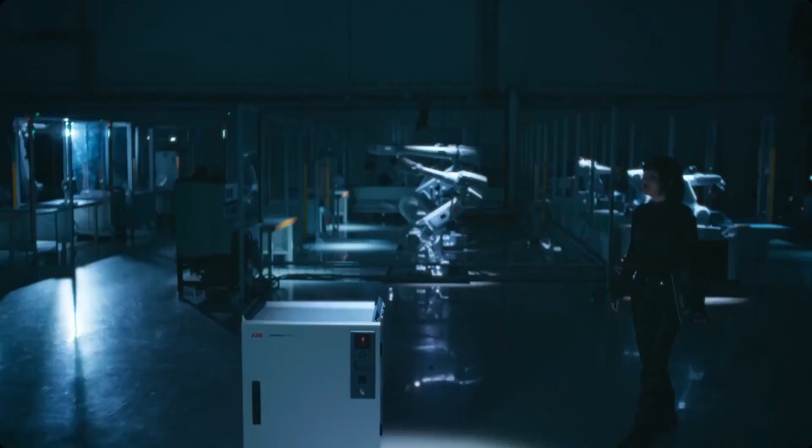Today we would like to guide you through our mission, our statement of the sustainability agenda, and how we have designed our robots, starting with the robot controller, the robot itself. We also have a service perspective on what we are doing to guide you through the life cycle, and end with a summary and a Q&A.

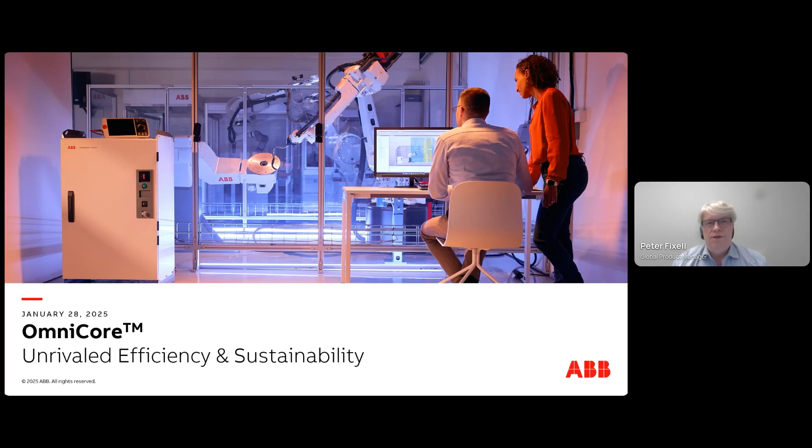My name is Peter Fixell, and I'm the Global Product Manager of Robot Controllers. But first, let's start with the first topic on our agenda, the sustainability part. And with us, we have Emma.

Hello everybody and welcome. My name is Emma Brimdyr, and I am the Global R&D Sustainability Specialist here at ABB Robotics. I'm so glad that you are all joining us today. As Peter said, I'm here to talk about our sustainability agenda here at ABB Group.

We have three main pillars in our agenda. The first is that we enable a low carbon society. We also promote social progress. And our third pillar is that we preserve resources. While working with each of these, we make sure to constantly have integrity and transparency.

For each of our three pillars, we have many goals that we are working towards. To enable a low carbon society, we are working to be net zero by 2050. We are also aiming to preserve resources by ensuring our products are circular, and have goals to reduce the amount of waste that we send to landfill and to protect the water, biodiversity, and the use of land.

For social progress, we are striving to have more women in senior management and ensuring the health and safety of our employees by constantly working to reduce the amount of lost time when it comes to injuries. And while we could talk about each of these in more depth, today I really want to focus on how we are enabling a low carbon society.

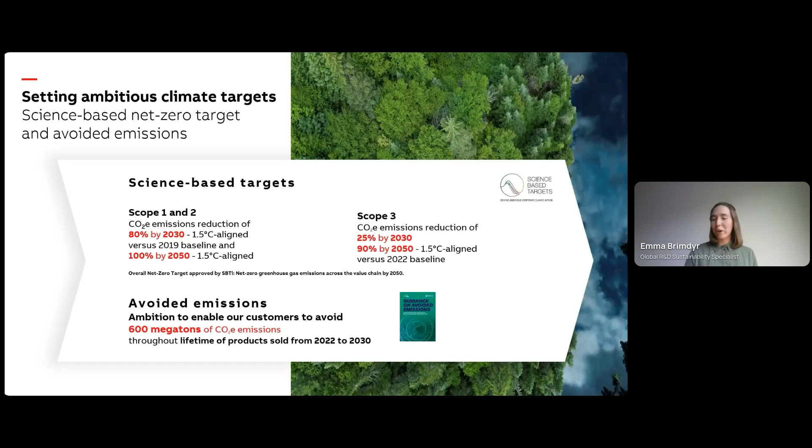And if your company has sustainability targets, we can also help you achieve your goal and save energy. One of the ways that we can reduce energy consumption is by making our products more energy efficient, and one of the ways we can do that is with our new OmniCore controller. Back over to you, Peter.

Thank you very much, Emma, for guiding us through the vision statement we have and the sustainability agenda. We can talk about the agenda, how we operate, how we run our business, how we do our sourcing, how we produce, but ultimately we will also have products that will be the concrete, visual statement of what we can help you with.

OmniCore is our new family of robot controllers, replacing the IRC5. For the OmniCore controller, in order to simplify the discussion on the value creators that we bring with this product, we have divided it into 6 different areas: endless flexibility—how can you build and create your own applications—digitalization and security, productivity, which of course is a baseline of a robot system, sustainability, as we are targeting today, safety, and a lifelong commitment. Today, we will focus on the sustainability part.

So on the next slide, I will show you, there it comes.

What is sustainability? When we discuss sustainability on our products, when we are creating the products, when we are reviewing designs, we are sustainable when we discuss the choice of material, the sourcing, the production of the product. But what we give to you as customers is the energy consumption. So that is really what we want to target with this presentation.

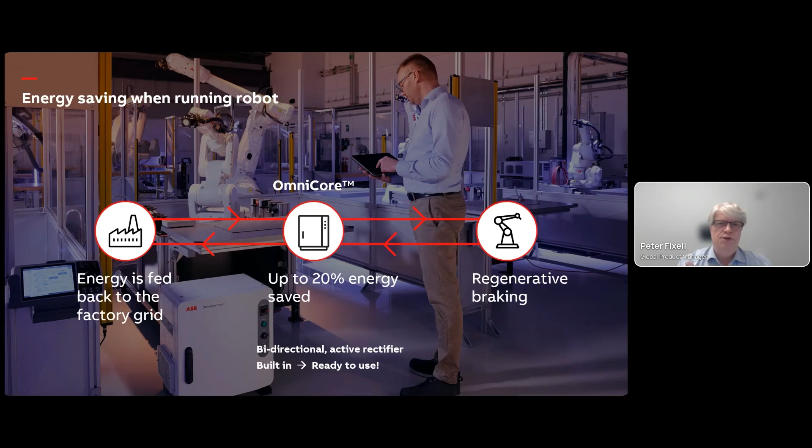On the next slide, there is a situation when you are using the robot in operation, but as you all know, there are pauses in your production process. When the robot is waiting for machinery or some other process equipment, or if you have a tacted production line, you're waiting for the next tact. So there is waiting time built into any process we look at. Traditionally, you have kept the robot running with the motors energized. And when the motors are energized, you are fighting gravity. So the robot is standing still, but it's fighting gravity and consuming a lot of energy. For a large size robot, this is about 800 watts.

So what you can do is activate the brakes directly. You can do it within 3 seconds, 10 seconds, your choice. But if you activate it early, you are saving 800 watts during operational waiting times. So that is the second part we have.

Now the third part, when it comes to design of a robot system, illustrated with this nice bear that is sleeping, is what we call hibernate or wake on LAN. Imagine that you're going for lunch, or leaving the factory for the evening. It would be so traditional to leave all the systems powered up. But what if you want to save the energy that the robot system or any process equipment is consuming?

Then we have what we call a remote switch. This enables you to switch off all the robots from a PLC or some other centralized equipment, saving another 200 watts approximately, so it's consuming less than 5 watts in this status. So really, during operation, while waiting, and during downtime at nights, evenings, weekends, if you are active, you can save a lot of energy. So these are the things built into the system.

Now I want to hand over to our friend within the robotics business, Mischa Troxler.

No, sorry, I have one left.

When you program the robot, that's really when you're running the robot. Either you do a manual programming that is based on the experience of that specific person, or you can use our software platform, RobotStudio, which can provide you with automatic path planning, meaning that we provide you with a starting point and an end point, and RobotStudio will automatically generate the best path in between those positions.

And if you have simulated the environment in a CAD model, it avoids collisions and gets the perfect uncollided path. In this way, you can reduce programming time from approximately 45 minutes to 2 seconds. It's just a click away.

You will reduce the cycle time, and best of all, you will reduce the energy consumption, with, in this example, 36%, but that's an average we have. Depending on how complex the path is, you will save more. If it's a fairly simple path, maybe you will not save 36%, but it will give you the best ever path. So that was the fourth thing, how you program your robot.

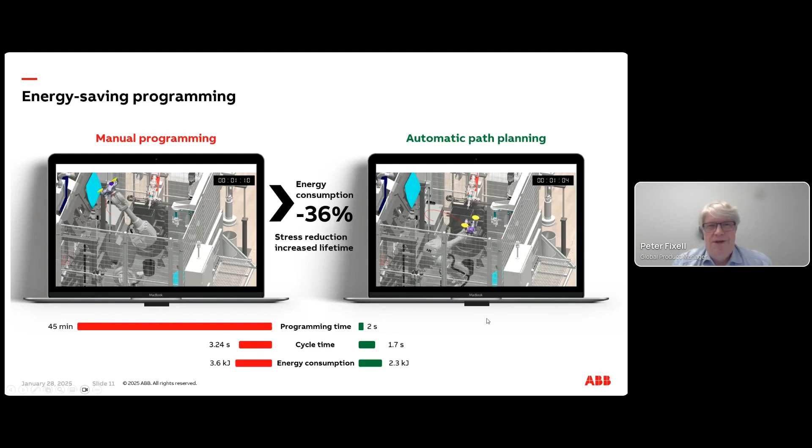So we really are focusing on giving you the best opportunity to be sustainable. Now it's time to hand over to my friend Mischa.

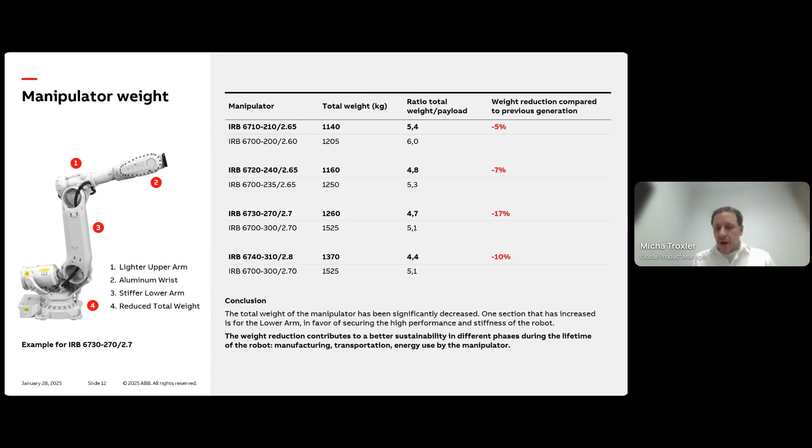On the next slide, we see a comparison broken down to the different levels. This is now the example of the 7700, the second new robot from our large portfolio. We see that the total weight has been reduced by 8-9%. Doesn't sound like super much, but importantly, the wrist and the upper arm in general got lighter. Here we see drastic reductions of up to 26%. So the weight is drastically decreased, and this will help save energy in the use phase.

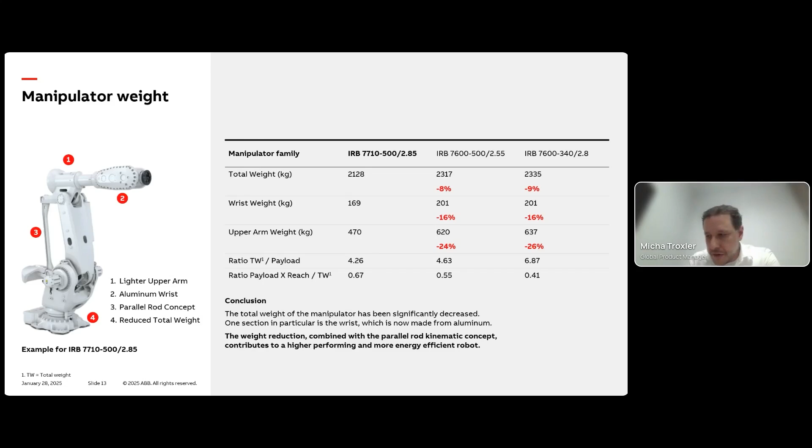On the next slide, we see the average savings, or up to 20% savings for the 6700. This is split: roughly 10% contributed from the OmniCore, and 10% due to the lightweight design of the robot. And on the 7700 or 77X0, it's up to 30%. Here we have more contribution because we are also dealing with a heavier robot that we redesigned.

In this context, I would like to give you two examples of what this could mean at application level. We've done two extremes, I need to admit that. We take a spot welding line having a fleet size of 500 robots, a cycle time of 60 seconds, thereof 50 seconds robot running and 10 seconds robot in waiting position. For the simulation purpose, we used 8 hours, 3 shifts, 5 days a week.

We compared this between our 6700 based on IRC5 and our new 6720 based on OmniCore. So it's the same payload reach combination, and we are facing a yearly reduction of very high numbers - more than 1 gigawatt of energy saved per year. So this is not only a goal to contribute to your sustainability aspects, this is directly money that is reduced from your electricity bill and moved out of your OPEX expenses.

Of course, this is very different depending on whether it's the Americas, Europe, Asia, or China. We differentiate between Asia without China and China, because the price level of kilowatt hours for industrial use is pretty different between these 4 regions. But still, the important message here is 14% energy consumption savings, and this is independent whether you have 500 robots or 1 robot. At the end of the day, it's 14% savings.

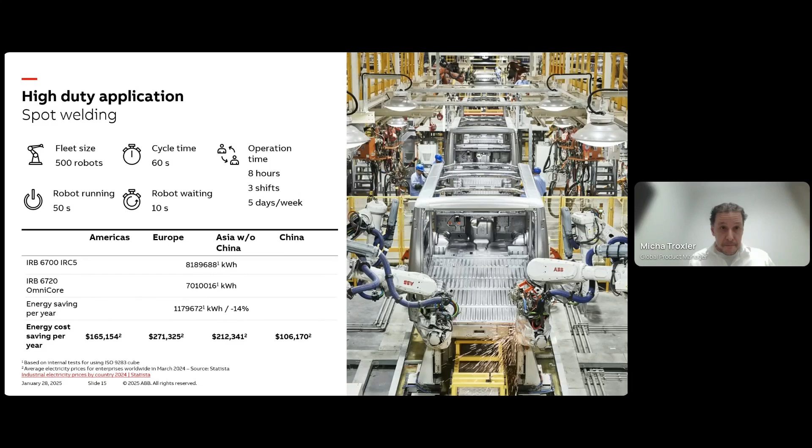Second example is for the 7700 based robot. So here we have a die casting low duty application. This is a smaller fleet size, with a long cycle of 120 seconds: 30 seconds the robot is running, and 90 seconds the robot is standing still.

For simulation purposes, we took 8 hours, 2 shifts, and 5 days a week. And we are comparing here two setups: a 7710 on OmniCore with a 7710 on OmniCore, but one with brakes on and the other one without brakes on.

As Peter just explained a few minutes ago, simply engaging the brakes can reduce your energy consumption by roughly 30%. This pays out as well on your electricity bill and contributes, of course, to your sustainability goals. And with that, I hand over to Jan, I think.

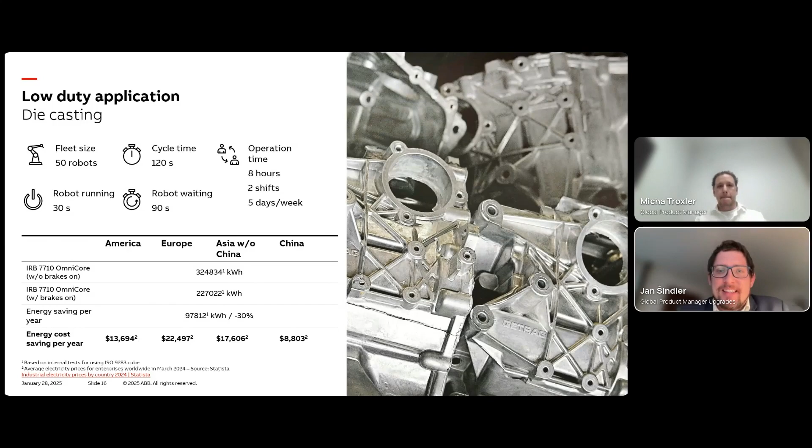Yeah, you're right, Micha. Thank you. Hello everyone, my name is Jan Šindler, and I'm global product manager for upgrades. I'm speaking here on behalf of customer service and our point of view on the sustainability topic.

So by listening to Peter and Micha and hearing about all of the new features, there are actually 2-3 questions that came to my mind, and I'd like to find an answer to those for you. The first one is: what should I choose first out of those great features that we are providing, and what would be the impact to my installation?

The second question is, if I already have a robot installed, no matter if with the OmniCore system that we are speaking about today, but also with the older systems, what kind of improvements can I achieve there? And the last one is, a lot of you are implementing the ISO standard 50001, and what kind of actions can you take to improve those initiatives within that standard, and also be able to easily report it and discuss it with your managers to get the money for the improvements?

To all of those questions, we are trying to provide an answer in a tool called Energy Efficiency Service. This toolbox consists of 3 separate tools that can be used exactly to answer those questions that I mentioned. The first one, the standby energy optimization, is focused on improving the energy of a robot when it's not moving, when it's in idle.

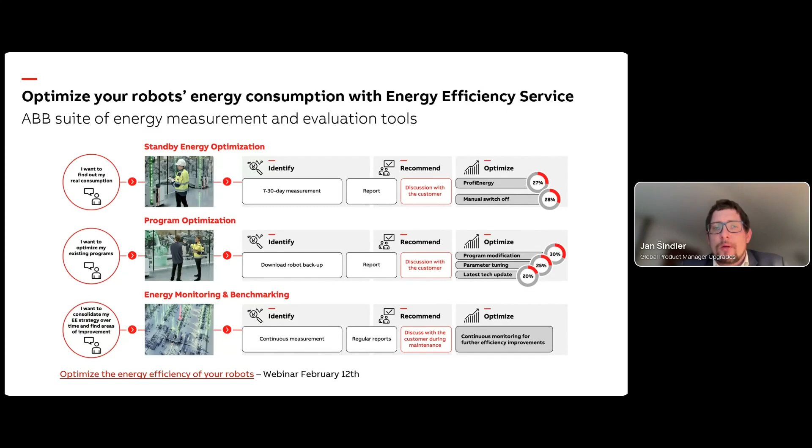On the next slide, as we are working with the robots that are in your factories, it's good to talk about how the OmniCore controller and the steps we've taken support circular economy. First, we implement a lot of old manipulators that ABB produces into the RobotWare of the OmniCore controller, which means you can easily switch an IRC5 controller for the latest OmniCore.

And if you have a really good manipulator in a good state, you can keep it and run it on the OmniCore system, which brings a lot of new features that have been mentioned.

Now, what to do with the old one? We have a buyback system, so we can buy back the old controller from you, refurbish it in the refurbishment center, and give a second life to the robotic system that can then be used by other customers. By doing all of this, we're extending the life of ABB products and helping you get rid of the old products that are not useful for you. All of this supports a circular economy.

All of those things are implemented in the OmniCore system, the OmniCore ecosystem. And that's all for me, so handing the word over to Peter.

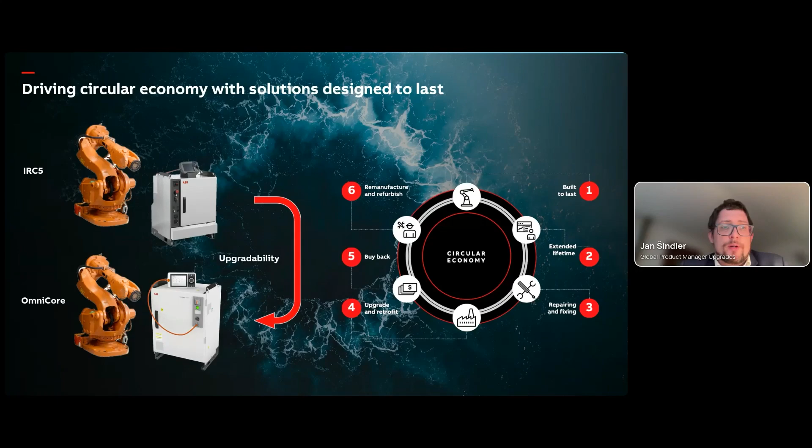Also on RobotStudio automatic path planning, that is actually available if you have an installed base of IRC5 controllers. If you have a bottleneck, dig into using the automatic path planning to remove the bottleneck, and you can see your productivity increasing. On the robot line, we have done a lot of redesigns.

Imagine this, I think it's the 7th or 8th generation of large robots from ABB, and still we are improving. We are never giving up on giving you the best robot ever. We have built-in redesigns to remove or reduce energy consumption, but also increase the performance and flexibility of the robot itself. And last, we talked about our life cycle support.

If you want help to evaluate your installed base and your factories, you can use our customer service organization. They are ready to help you improve your productivity and reduce your cost of operating. And once you're done with the robots, we can buy them back and give them a second life for customers that still need those dedicated robots, giving them the opportunity to produce even further.